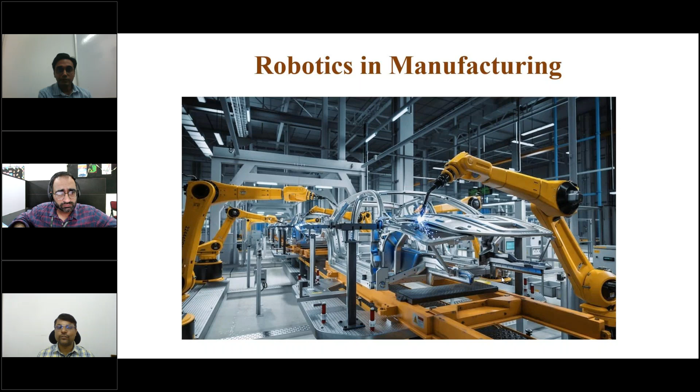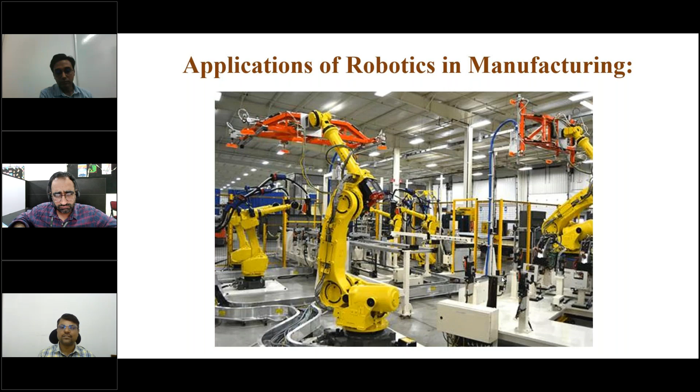Earlier, you must have seen in any industry or in any YouTube video that the collaboration with robots as far as humans are concerned was not that much involved in the industry. Robots used to be caged for the safety of the operators, so as to avoid any accident. But now with the advancement in cobots, we are in a position that we can work with robots without worrying about any accident or harm to the human operator, which is of course a big revolutionary step.

When it comes to cobots, when we need to define it in technical terms, it is very easy, and it is always better to call it as the name suggests - collaboration. Actually, they are designed with human operators by providing flexibility, improving efficiency, and ensuring safety also.

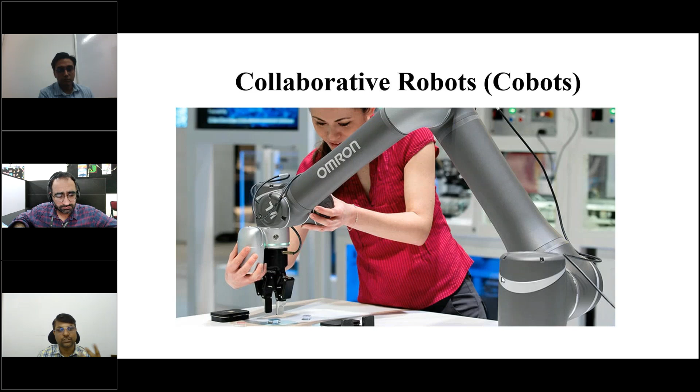Now when it comes to key features of cobots, the first one is of course human interaction. Human interaction with cobots has been taken to the next level, as you can see in this slide also. Without any worry, an operator is handling the cobot like a small child. We are guiding someone on how to deal with it in the real-time environment, so that is like teaching a human baby. Nowadays we are in a position to teach the robots also without any worry.

We have safety mechanisms, and cobots are quite easy to program as compared to industrial robots. They are quite versatile and can be reprogrammed for different operations, as you can see on the screen. There are a number of different sectors: automotive, food commodities, semiconductor manufacturing, and a number of industrial operations.

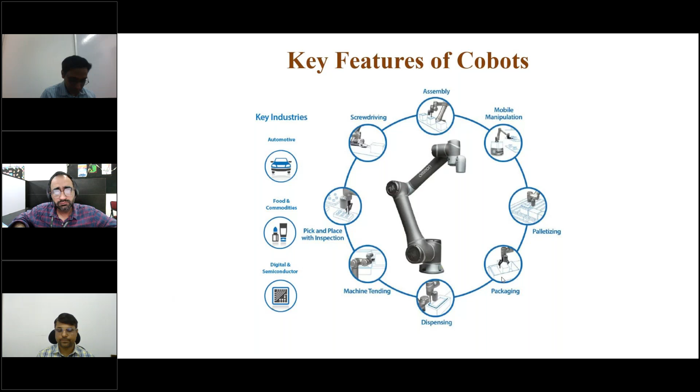So when it comes to various applications, as I was sharing with you, these are the applications which we use in industry for cobots. It could be gluing, machine tending, loading and unloading, or assembly. These are just a few examples which I'm sharing, but they are endless in number, and since we have limited time, some other day we will talk in detail about the applications of cobots.

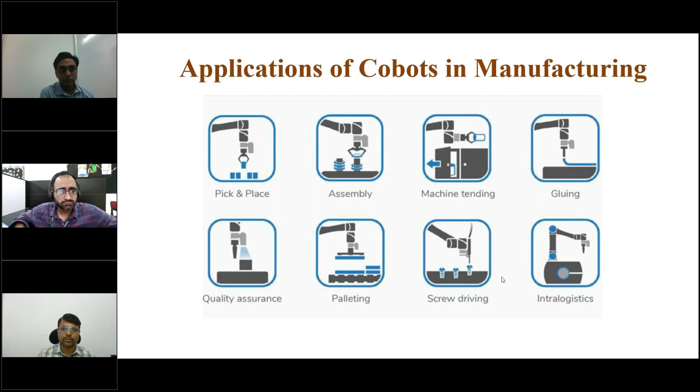When it comes to examples, as I told you, Universal Robots have made a significant impact in this area to enhance the productivity of cobots. We also have a company, Rethink Robotics, which is also contributing in this area with significant investment.

Now, this is about the role of robots and cobots in next-gen manufacturing. There's one more important area left in this branch, that is additive manufacturing. Additive manufacturing has also changed the whole scenario of manufacturing and has taken it to an unimaginable level.

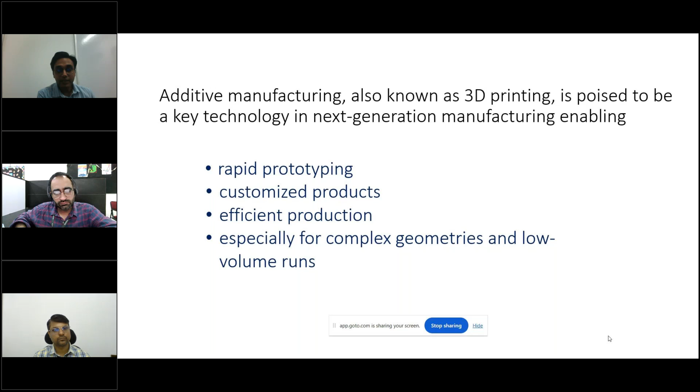Another reason is efficient production, and the most important feature of additive manufacturing is its ability to make complex geometries. Additive manufacturing has actually evolved over around 30 years or so. We started calling it rapid prototyping, then we started using it for tooling purposes, and now it's a well established manufacturing process used for automobile, aerospace, and even electronics.

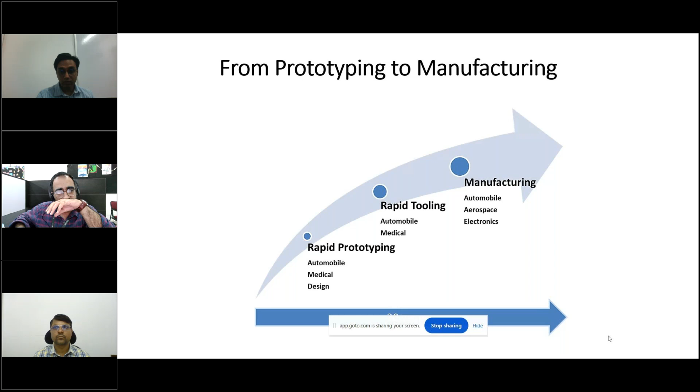Instead of having multiple pieces fabricated separately and then assembled, because of additive manufacturing they were able to make the entire product as a single part, which saved a lot of resources and assembly time. This was only possible because of the nature of additive manufacturing, which gives the ability to make any kind of complex shapes, substances, or parts.

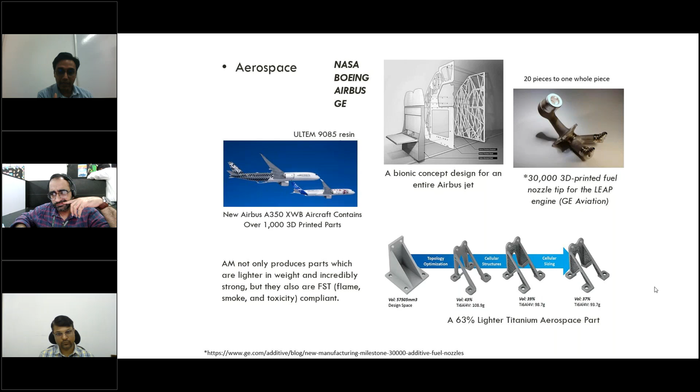A lot of material has been saved, and we were able to make it much lighter—to be specific, 63% lighter. This is a titanium material, and again this is possible because of additive manufacturing, since its nature allows it to fabricate any complex part very easily, because it builds the part layer by layer.

For aerospace, the very first instance of off-world manufacturing—that is, manufacturing out of the world—was actually done using additive manufacturing. We have 3D printers which can work in zero gravity, installed in space centers, where people can actually print something if they require it.

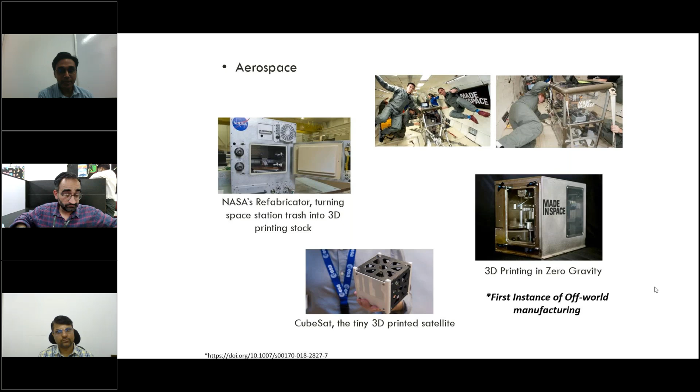Next, I'll show you another sector where additive manufacturing is used: the automobile sector. People use additive manufacturing for manufacturing their parts. One application is functional prototyping for making tools or molds—jigs and fixtures are very important—and even entire automobile components. Many companies are into this; Mercedes and so many other companies are using 3D printing for various purposes.

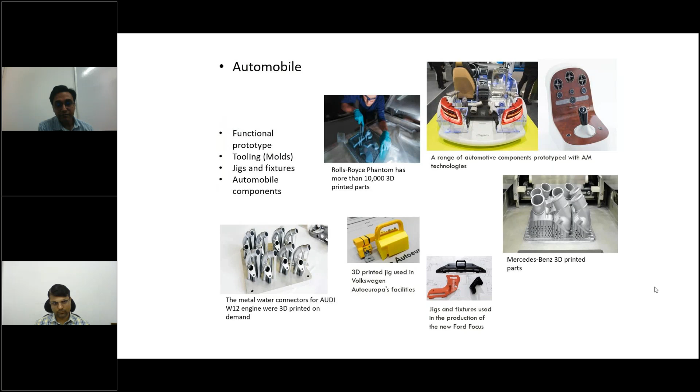In the next slide, I'll discuss another area, which is medical.

This is an area which has actually embraced additive manufacturing from a long back, because here we can fabricate any complex part, as discussed earlier. Now you can see that if I want to make any anatomical model with different colors and different properties like hard or soft, I can do it with the help of additive manufacturing.

We have processes under the umbrella of additive manufacturing which can help us make multi-material parts, even with different colors. On the right side we have a 3D printed device designed for the removal of cancerous tissues. You can see the size is very small, comparable to a matchstick, but it can still be fabricated, and it has teeth. Again, this is possible because of additive manufacturing.

On the left side we have a prosthetic hand, a very interesting invention named Cyborg Beast by the designer. The beauty of this invention is that it doesn't require any electronics. It can be directly 3D printed within a few hours and assembled. It's body powered, and it was made specifically for kids, because as kids grow they will be outgrowing the prostheses, and in many countries many people cannot afford these things.

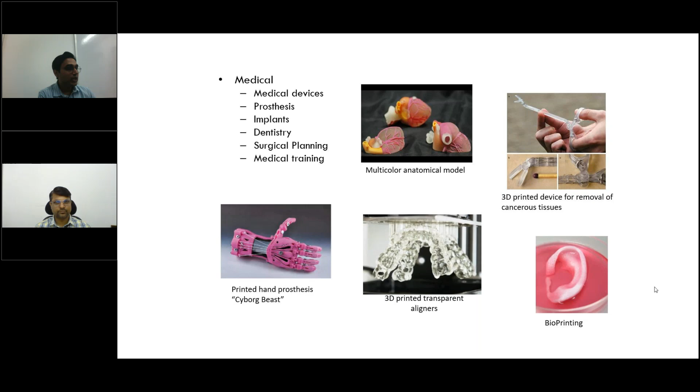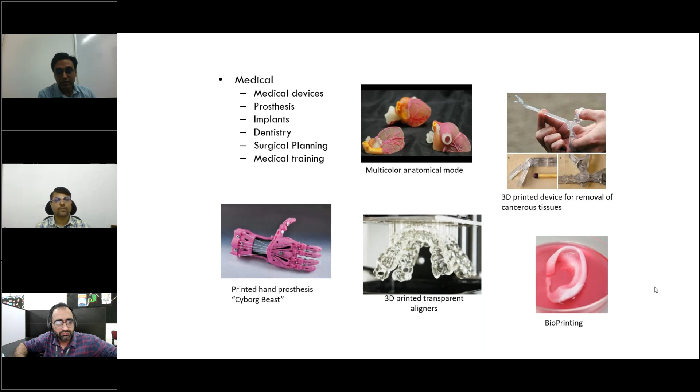So what they are doing is using 3D printing to fabricate these kinds of prosthetic hands, which are very cheap, and we can just scale it up the moment the previous prosthetic hand no longer fits the patient. We can just scale it and print it again, and within a few hours the new prosthetic hand will be ready. So this is one industry which has actually used this a lot.

Now here's another case I'll discuss. Not only for making devices or anatomical models, people are using 3D printing for pre-operative or pre-surgical planning purposes also. This is one case we dealt with, a patient who had a knee fracture in the tibia bone, and we got the CT scan data of that patient.

We used the data to create the virtual model, created the CAD model, and then the scaled-down physical model within 7 hours. This was used by the doctors and surgeons to plan the surgery. The benefit was that a lot of blood loss was reduced and the patient recovered faster, and this is obviously due to the capability of additive manufacturing.

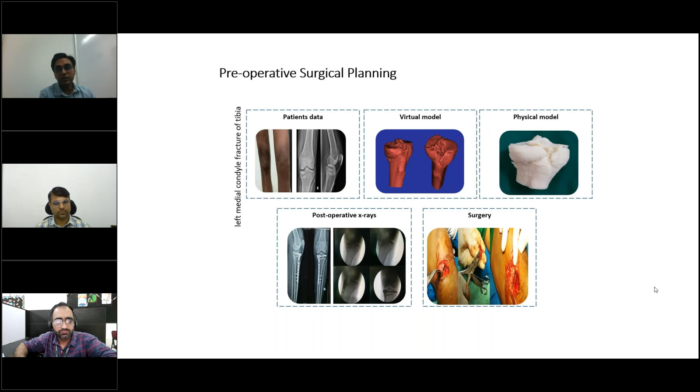So I'll go to the next slide now. Before ending, I'll explain the basic procedure of additive manufacturing and the different types that can be utilized for next generation manufacturing. Because additive manufacturing, as I said earlier, can be thought of as an umbrella with different spokes in it, and each spoke is a different technique of additive manufacturing. So first I'll explain the basic concept, or the process flow, of additive manufacturing.

So we start with creating a CAD model. I can create this CAD model using any CAD package, or using medical images like DICOM images, CT scan data, or any reverse engineering technique to collect data points, point cloud data, and fit surfaces to create a model. Once I have the CAD model, I'll convert it into an STL file. Nowadays we have other formats as well, but this is one of the de facto standards used in the industry.

Once we have done this, we'll do certain slicing, because the nature of additive manufacturing is that it builds parts layer by layer. So we prepare the data for each layer, which we call slicing the model. Once we've selected the parameters and sliced the model, we get the instructions for the machine, which we call G-code. Once we have this G-code, we put it in the machine, and it will fabricate exactly what we created in our CAD model in the virtual environment, now made physical with the help of 3D printing. If required, we'll do certain post-processing, and the part is ready.

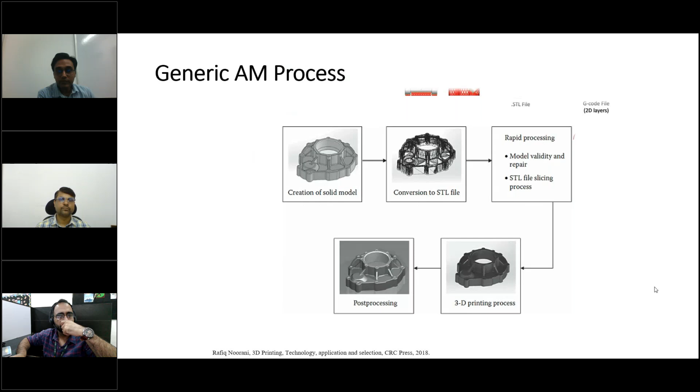So this is the next slide I'll go to, and I'll show you the categories. Now these categories, we have grouped into seven basic categories. One is what we call VAT polymerization, which I'll briefly touch upon.

Then we have material jetting, binder jetting, material extrusion, powder bed fusion, laminated object manufacturing, and direct energy deposition.

So these are the different techniques through which we can create a part from CAD model to a physical part, and any complex part can be created, because we are breaking down the complexity of the part when we do the slicing operations. So for any industry to decide on fabricating any complex part, we have these seven categories from which we can decide which category to use and install those machines in our factory to start fabrication. All these categories work on different principles—one based on material extrusion, one on laser sintering, some on photopolymerization. So all the working principles are different, but all these are categorized under additive manufacturing, because all make parts in a layer by layer fashion, and that is why we can make any complex part.

I'll just quickly go to the next slide, seeing the time. These are some of the materials which can be used. We can use metals, polymers, fibers as well in 3D printing, additive manufacturing. We can use paper, wax as well. So we have a wide variety of materials that can be utilized for additive manufacturing.

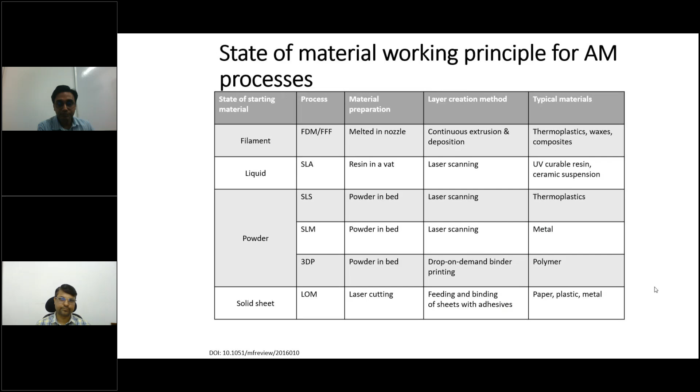Concluding, I'll just emphasize that for next generation manufacturing, some of the key aspects are robots, cobots, and additive manufacturing. These are not the only pillars for next generation manufacturing, but important pillars that people are using. In the coming days we are going to see a lot more utilization of these techniques. So from a student point of view, what you can do is upgrade yourself in these skill sets, and you will be future ready.